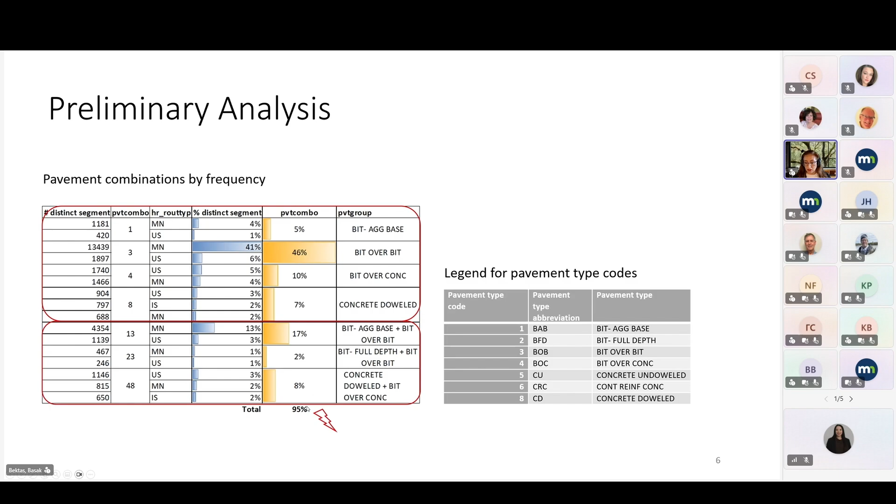As pavements age and undergo rehabilitation, their compositions and types evolve. Most segments in our data set are associated with one or two pavement type codes within the data, and the MnDOT abbreviations for these pavement types are given to you here. The 7 pavement groups shown on screen account for 95% of the data set we got from the Pavement Management Unit. So this formed our initial base data set.

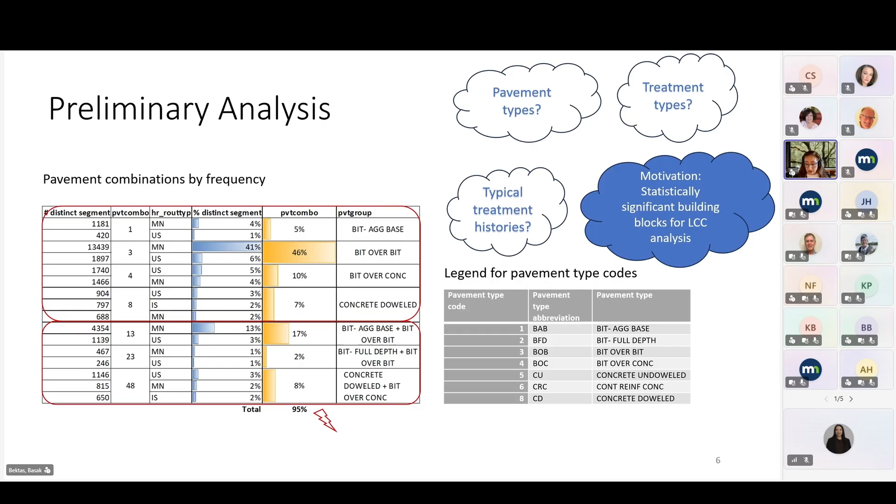We also conducted preliminary analysis to identify the most frequent treatment types and the sequencing of these typical treatment histories. This very comprehensive preliminary analysis was done with the motivation to build data block samples that will eventually help us model the life cycle pavement performance in a statistically significant way, so that we can utilize them in a life cycle cost analysis we have confidence in.

While we initially attempted to classify preventive maintenance directly from the data - there was a question, particularly from MnDOT partners, of how you define preventive maintenance based on data - we attempted to do that, but the variability in the RQI data made a purely data-driven classification unreliable.

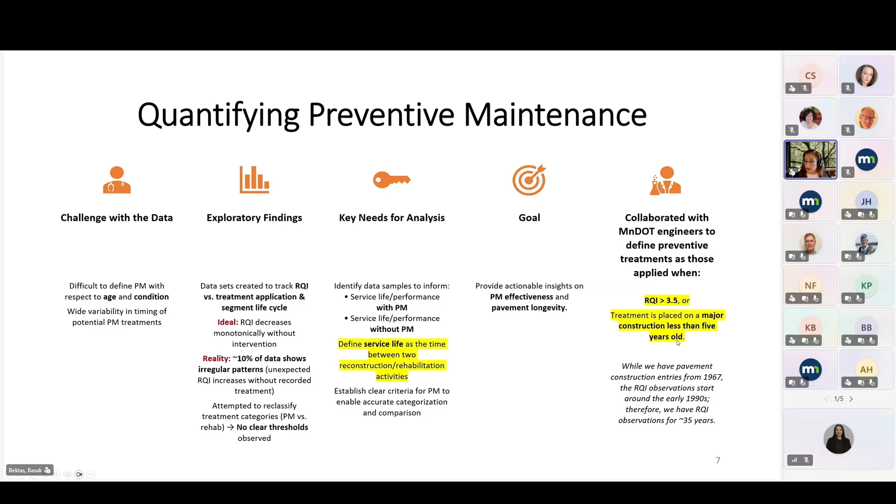Instead, we first defined what I call base service life - not the full one - as the lifetime between two successive reconstruction or rehabilitation activities. Working with MnDOT engineers in some meetings, we identified PM treatments as those applied when RQI is greater than 3.5, or when the treatment was placed on a major construction less than 5 years old. Both of these, of course, lead to pavement still in good or near new condition.

For pavements with the data organized, we fit viable survival models to estimate time to rehabilitation for each pavement type, segmented by their PM history - PM being preventive maintenance, as I'll refer to often. The sample with pavements without PM, or any treatment between two rehab or reconstruction activities, had over 1,200 records, with mostly asphalt but some concrete pavements as well.

When we looked at the sample of pavements with PM, we focused on those with 1 or 2 PM activities, which accounted for the majority of the data set. Pavements with 1 PM were most frequently concrete pavement, with PM treatments like maintenance patching, joint seals, and joint repairs. Pavements with 2 PM were mostly asphalt pavements with typical crack repair, chip seal, crack fill, maintenance patching, and so on.

Here are the findings from our survival models. I want to highlight a few things from this slide because they tell an interesting story. For bituminous aggregate base, the scale parameter alpha, which you can think of as the characteristic service life between rehab or reconstruction, increases from about 15 years to nearly 21 years with 2 PM applications. This is a meaningful jump.

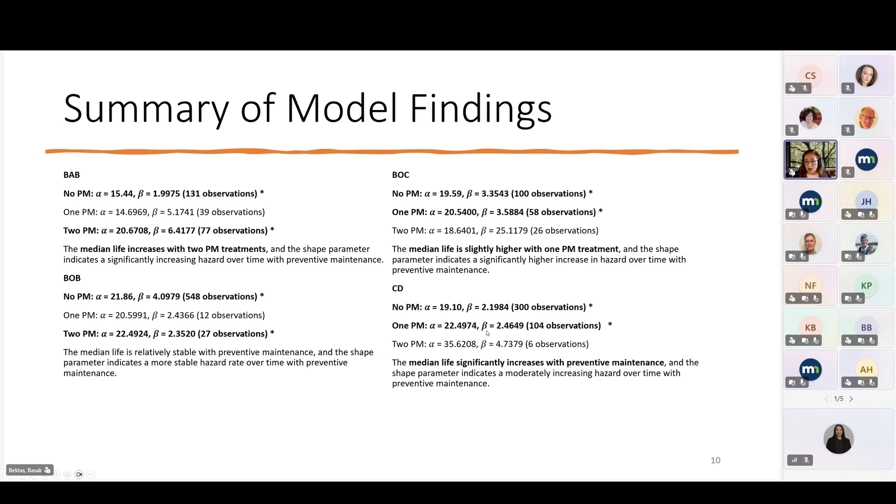This slide visualizes typical Minnesota pavement life cycles to illustrate how the survival models feed into the life cycle cost analysis. The intervals between the arrows represent time to PM, so the purple arrows are PMs, and we have rehab or reconstruction as orange arrows. The intervals between these arrows come from our data and models.

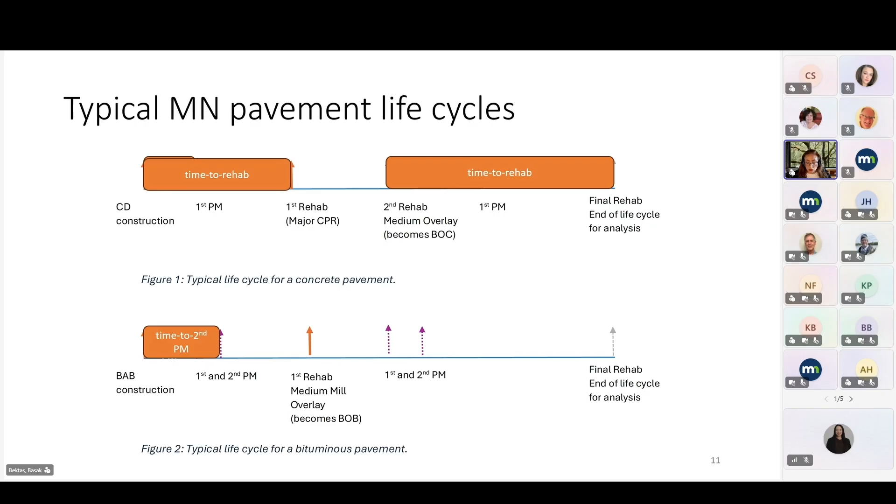So with the time to PM, we are looking at the statistical distribution, and with time to rehab, we are looking at survival models. So each carries a statistical distribution, and within the Monte Carlo simulation we did for life cycle cost analysis, these intervals are being sampled from their respective distributions as we calculate life cycle cost, propagating the uncertainty from the survival models through to the final cost estimates.

To translate service life results into economic terms, we use life cycle cost analysis, specifically equivalent uniform annual cost, or EUAC. EUAC allows comparison across life cycles of different total durations on an annualized basis, which matters here because PM extends service life. We conducted Monte Carlo simulations, thousands of iterations, randomly sampling the time to PM and time to rehab, as I showed you.

And we incorporated PM construction and rehabilitation costs, which gives us a distribution of life cycle costs rather than a single point estimate, better reflecting the real world variability inherent in pavement performance. Eight spreadsheet models were developed for the simulations, comparing life cycles with PM treatments or without, for asphalt and concrete pavements, and in urban and rural settings to also capture that cost variability.

Here are the results from life cycle cost analysis for bituminous pavements. The annual cost savings from applying PM range from $10,000 to $10,600 per mile per year, whether in urban or rural settings, and that comes with an added service life of roughly 5 to 6 years.

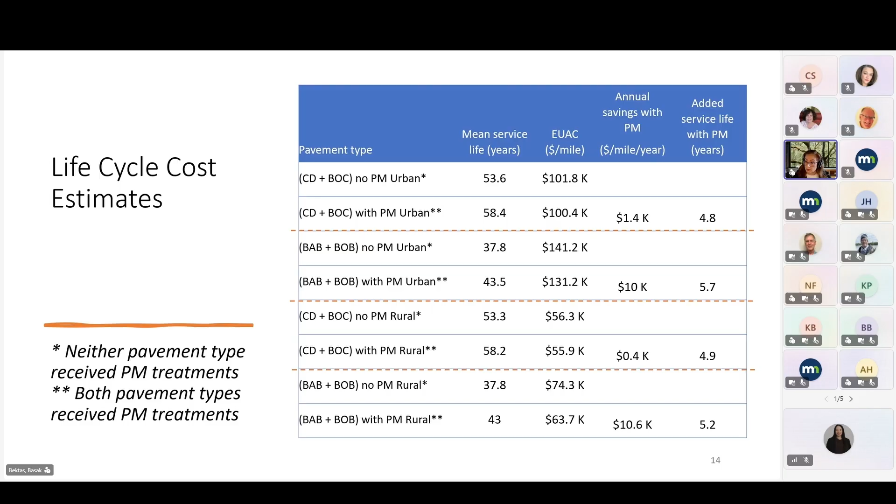A few important caveats I would like to mention. This analysis focused on agency costs only. Including other things such as user costs would steer the results even more favorably toward preventive maintenance. User costs, design factors such as traffic loading, long-term performance, and environmental conditions were not covered. As a result, the findings should not be interpreted as a comparison between concrete and asphalt pavements.

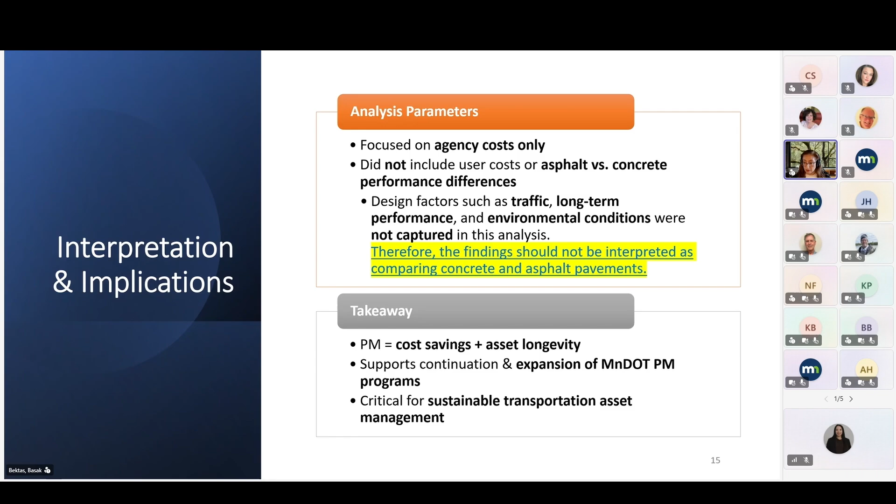But the core takeaway is straightforward: preventive maintenance delivers measurable cost savings and extends asset lives, and this is supportive of the continuation and expansion of MnDOT's PM programs, underscoring their importance for sustainable transportation asset management.

Here I also list key findings, some of which I've mentioned. Obviously, we have service life extension from statistically significant models. We have covered economic benefits, which have great potential across the network.

I will also emphasize how we defined PM at near very good condition pavement, and research findings enabled the development of enhanced decision trees that we shared with the agency.

Some recommendations we provided for MnDOT's future research or internal use: we developed enhanced decision trees that they would filter with institutional knowledge and expertise to adapt to existing guidance. There could be certain pilot programs to address areas where we didn't have as much data, such as concrete pavement preventive maintenance, and future research could explore other models.

Ultimately, our goal is to have helped the agency with data-driven tools that can feed into asset management practice.

So the question at the heart of this research was, can we prove the payoff of preventive maintenance? I think the answer, as I tried to show you today, is yes, at least for Minnesota's pavement network and with the data and methods we had available.

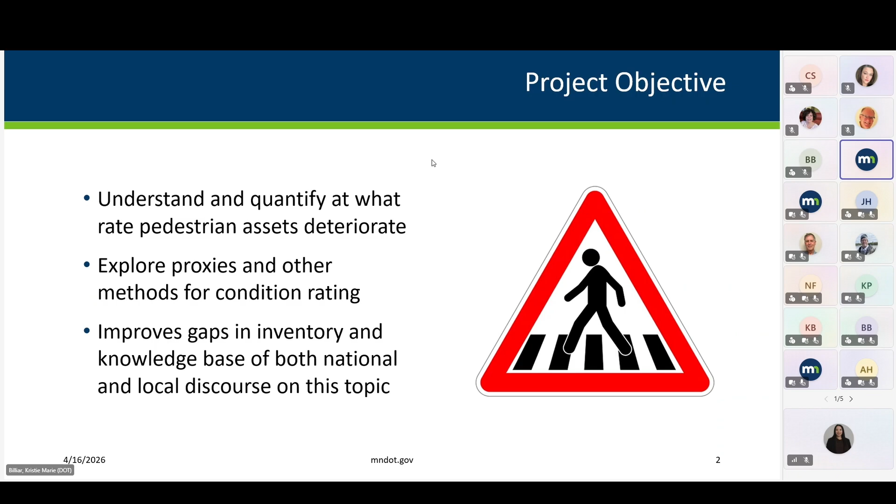We had 5 key steps for this: begin with literature research and a survey of agencies to understand where we're at, and whether this is a really worthwhile need. Then we did our field data collection, the processing of that information to create our baseline, and then developing the methodology of whether we can actually track deterioration, and the evaluation of that methodology.

Our survey touched on responses from 56 entities and 40 unique agencies spanning 25 states and the District of Columbia. Many of them were state DOTs, as you can see, but we were able to get a sensibility of what's going on at lower levels as well.

One of the most striking things, if you do work in bike and ped, probably not terribly surprising, is that pedestrian assets are generally found in the planning area. They really haven't moved into the operations place in most cases. This is part of why state DOTs were answering this survey, as we see TAM and TAMP type programs evolving in agencies, this need is coming up to the surface. But again, not unusual, we do see this quite frequently.

Finding who needed to respond to this was difficult. It sits aside from many of the main agency needs, and there is no particular champion for it. This is a little bit even why in MnDOT, ADA has a bit of a larger voice about pedestrian issues, even though we have a fully formed bike and ped office.

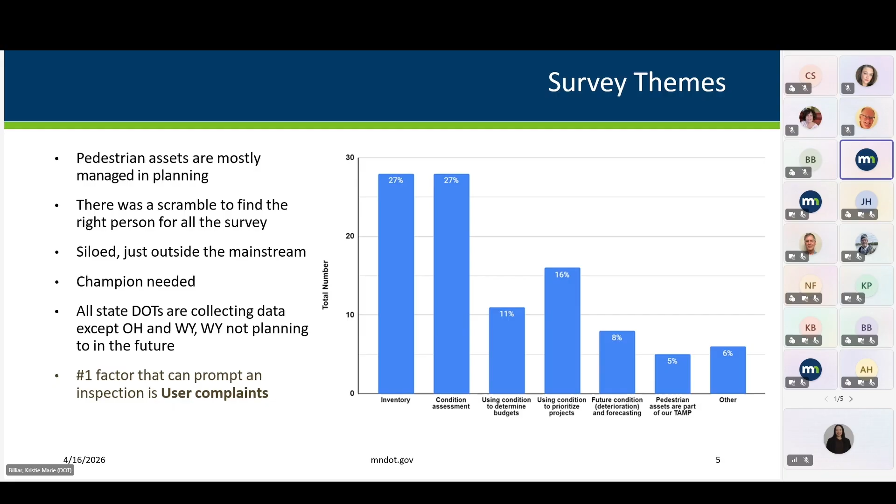All of the states were collecting something, with the exception of Wyoming, which is not planning to do so in the near future. And to give a better sensibility about that gap, user complaints are still our primary understanding of what our system needs. So we don't really have anything routine.

Our first piece in that field data collection was to look at what technologies are available and evaluate alternative assessment methodologies. We did 13 sites that were collected, totaling 15 miles. This is really about the sidewalk portion of the pedestrian access route.

Our decision was to use a bike-based data collection for collecting information on pedestrian assets. This is a data bike that has actually been used by Iowa for trails in the past, and they have a really good system for doing that. It's equipped with an iPhone, GoPro camera, and a 360 camera, which gives us a sense of the wide view, the roughness, the sensibility, and the 360 camera really functions as that LiDAR piece as well, showing what's going on around it.

This is something we've also found in the past. There's been a real push for us to collect this information from LiDAR, but unless you're doing a vehicle that's dedicated to that particular route and corridor, it's very hard to get information about the pedestrian assets from the center line, because you have parking in the way and you get a lot of distortion in that collection process.

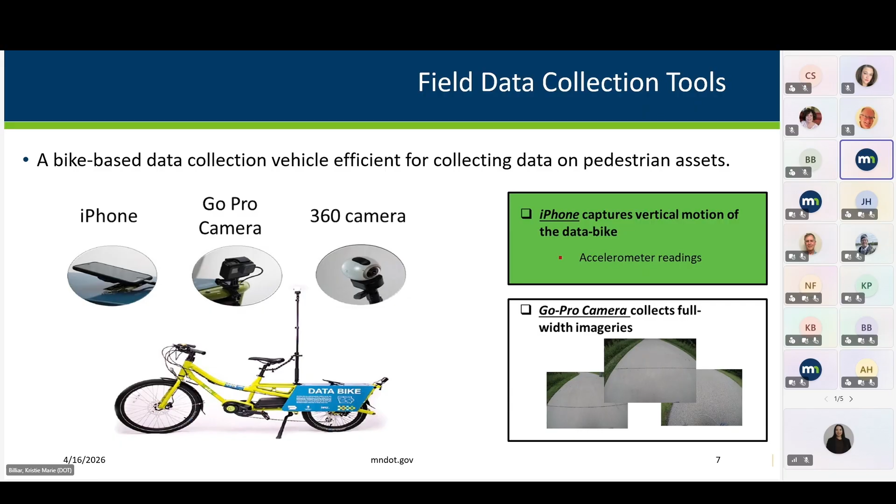So this was our historic baseline that we were trying to identify, finding some other gaps in data, mostly in the form of gaps in the existing system, so places where sidewalk might be missing. Condition assessment was largely a visual assessment, trying to get that inventory of distresses - where are things cracking, where are they heaving, interrupted by vegetation. The delineation of pedestrian asset management sections became our next piece, to calculate distress density and identify sites where condition had changed.

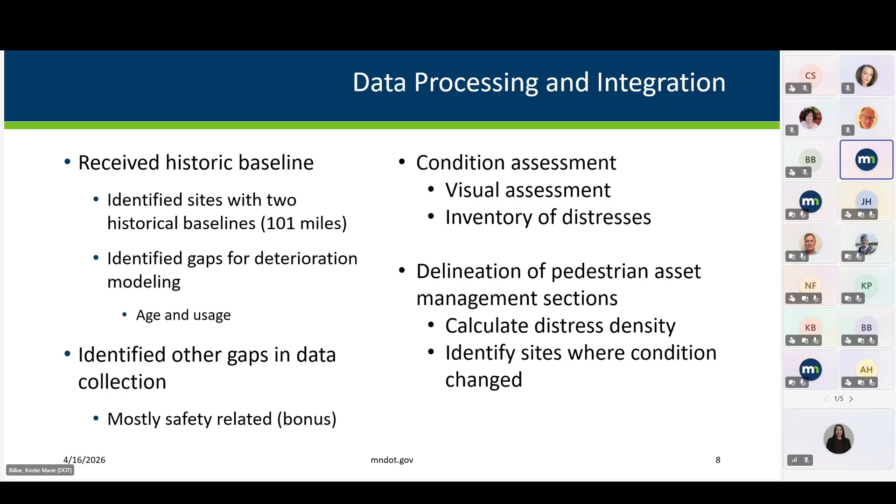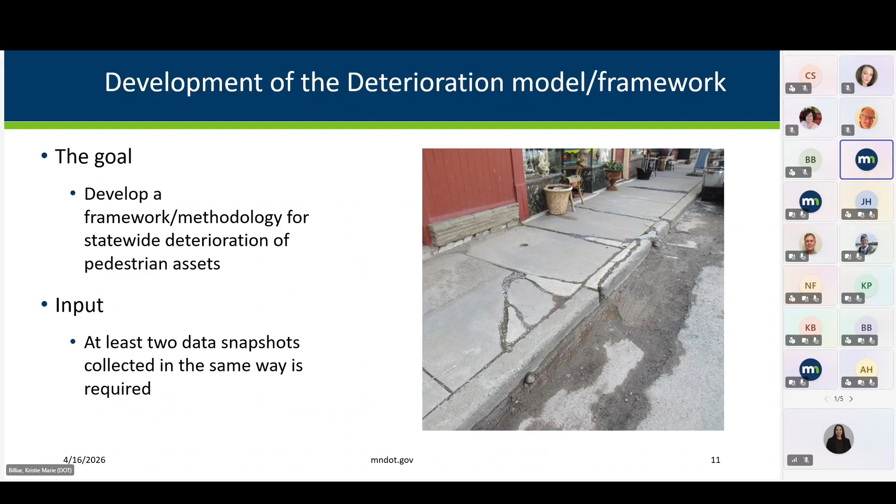At this point, we're now trying to develop a framework methodology statewide for the deterioration of pedestrian assets. We're looking for at least two data snapshots collected in the same way. This was a big requirement and a driving force behind how we were going to select what we would do for our deterioration model after the baseline.

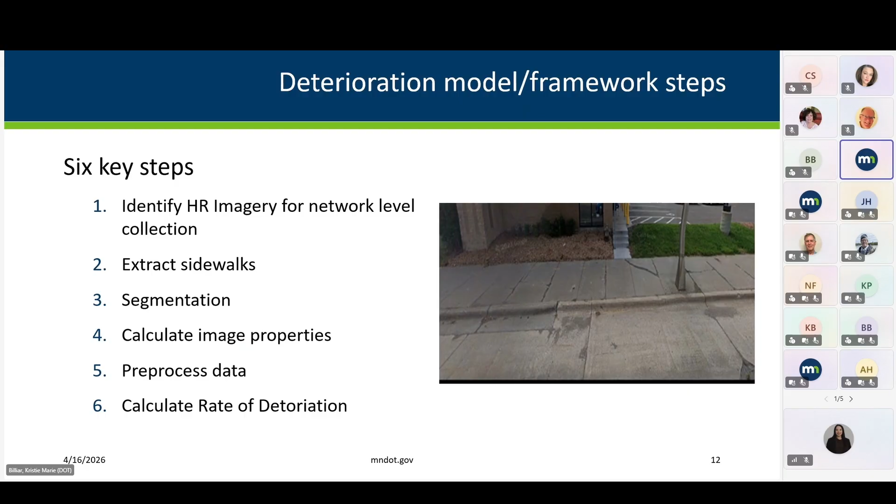So we had to find a way to identify high resolution imagery, extract the sidewalks from that imagery, give it a segmentation so that we were doing things consistently, calculate those images, preprocess the data, and then calculate a rate of deterioration. Spoiler alert - we did figure this out. We actually have a very good proof of concept.

Our data source selection - we looked at all of these: Google Maps, Earth, MnGeo, LiDAR, and NAIP. We ended up going with MnGeo aerial for a variety of reasons. Mostly, it's largely consistent - we collect it in the same way. Being under MnGeo, it's also readily available.

Using a lot of other systems like Google Maps, and that would extend to the Microsoft products as well - those are only available as a point in time. There are little variations that make it very difficult to do the digitizing of that information.

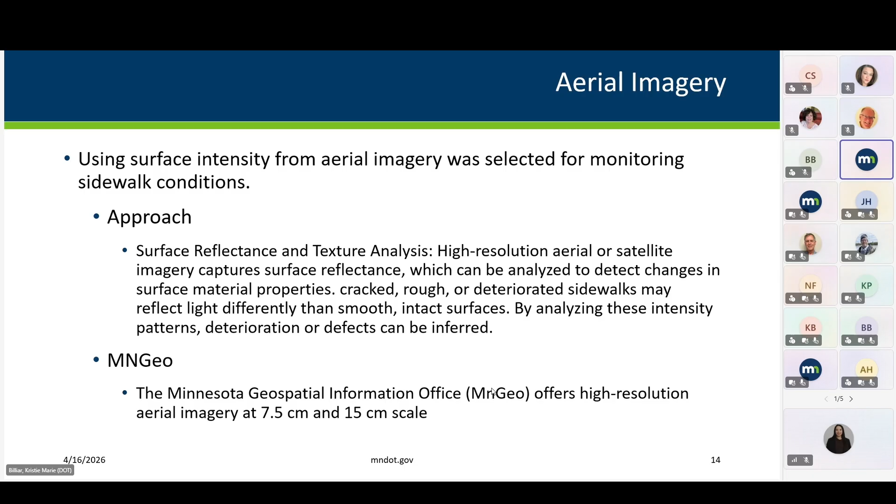So we were looking for surface reflectance and texture analysis - that's going to get what's going on with our sidewalks, what's happening with those cracks. And again, with MnGeo, we were able to get high resolutions at a couple of scales, so again, a very worthwhile approach.

So it facilitates consistent and uniform data collection. It also integrates very well with GIS, which is how that baseline was collected, so you're really getting an excellent comparison. And it also creates a measure of automated and semi-automated analysis.

For anyone who's been involved with the collection of pedestrian assets, at this time it is a very labor-intensive process. And when you're trying to calculate density or deterioration, it's not reasonable to be going out every couple of years to figure out what's going on. So this is part of how do we automate it.

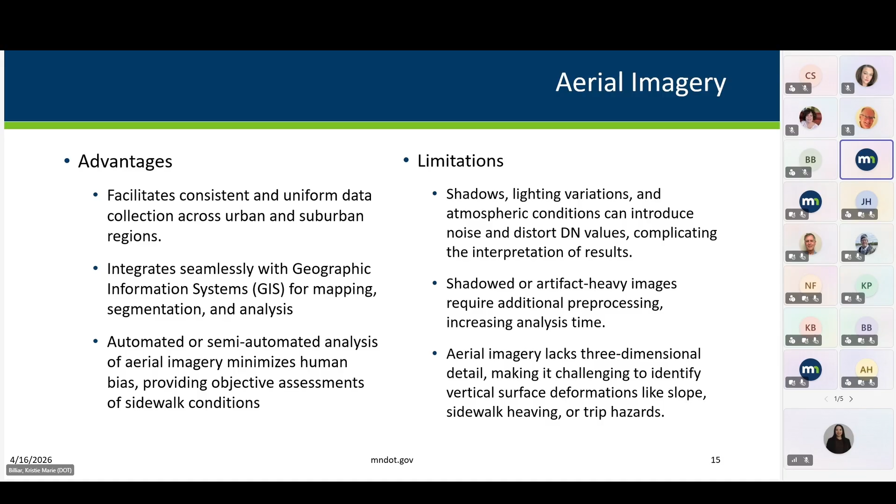There are some limitations with the aerial imagery that had to be overcome - shadows and lighting variations, shadowed artifact-heavy images, and aerial imagery lacks that three-dimensionality. So that was one of the pieces that we did sacrifice.

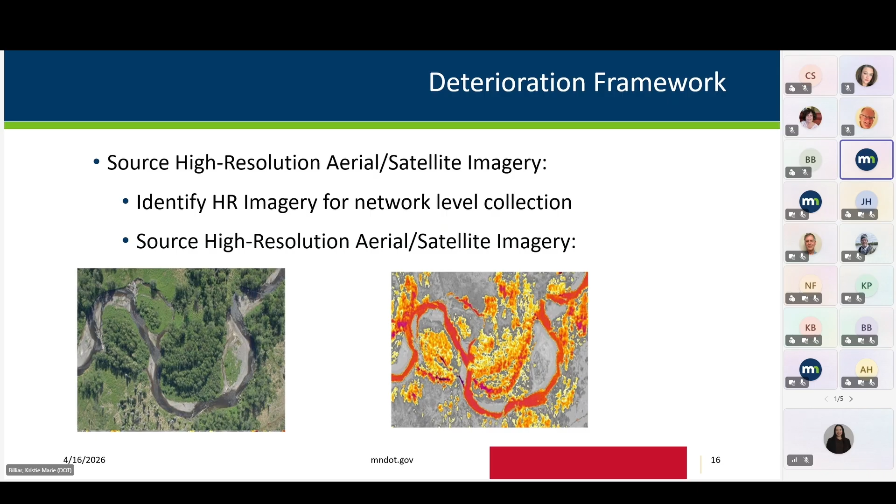So this is our high-resolution satellite imagery, and it allows us to do a network level of collection. It's a high-resolution satellite imagery, so you can see below.

So the next was really just doing a sidewalk extraction from those images. This was a much cleaner way to do this. Again, you aren't dealing with vegetation and all of that variance, and you get very clean polygons to do that.

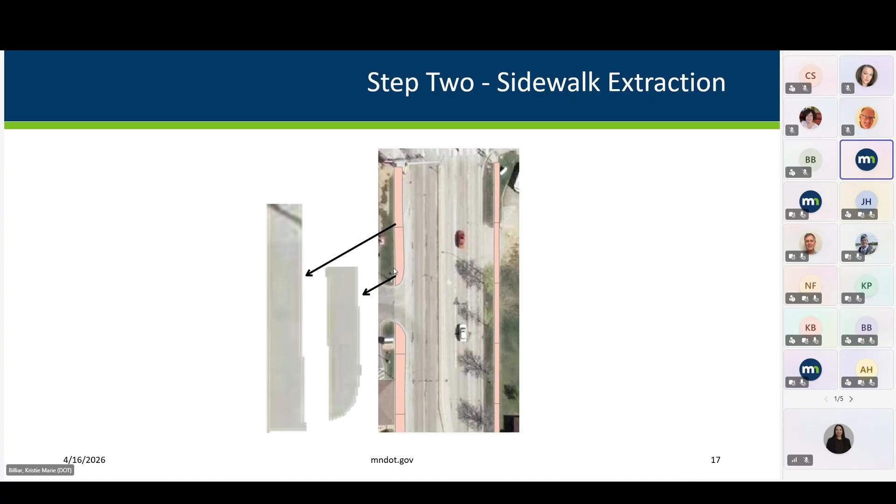The next piece was to take those polygons and segment them down further to 0.01 mile segments so that we could really get a detailed variation in the surface conditions, because the longer a section you do, the less accurate you are. So it was adaptive segmentation, adjusting dynamically with environmental complexity.

This is a little bit of why we also needed to know what was going on around it. For the attribute assignment, we identified this is a sidewalk, its age, foot traffic, proximity to trees, vegetation, and other environmental factors. So we're trying to get a little bit of context to that asset as well.

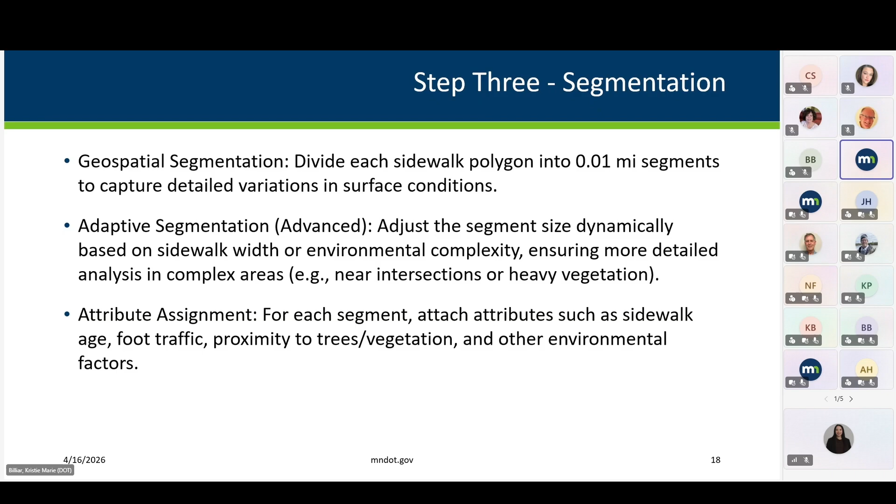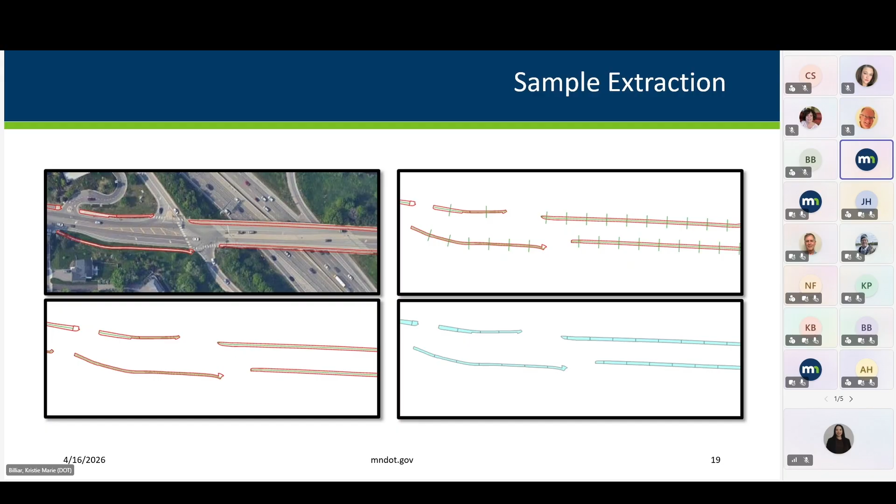So our sample extraction just walks through. This first is basically identifying the polygons and then getting down to that. This is where we are on the right, and then the image with the little hash marks are the 0.01 mile segments. So this is then the final how it would show up on your mapping.

So for the image properties, we needed to calculate surface intensity. We looked at surface reflectance data, which basically shows the cracks. Our statistical metrics were standard deviation for measuring surface roughness and variability, the mean, the median, and this resulted in what?

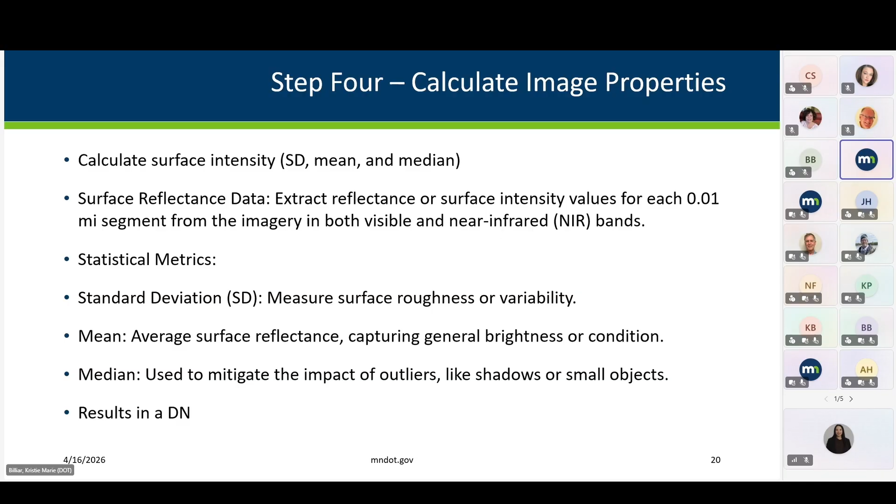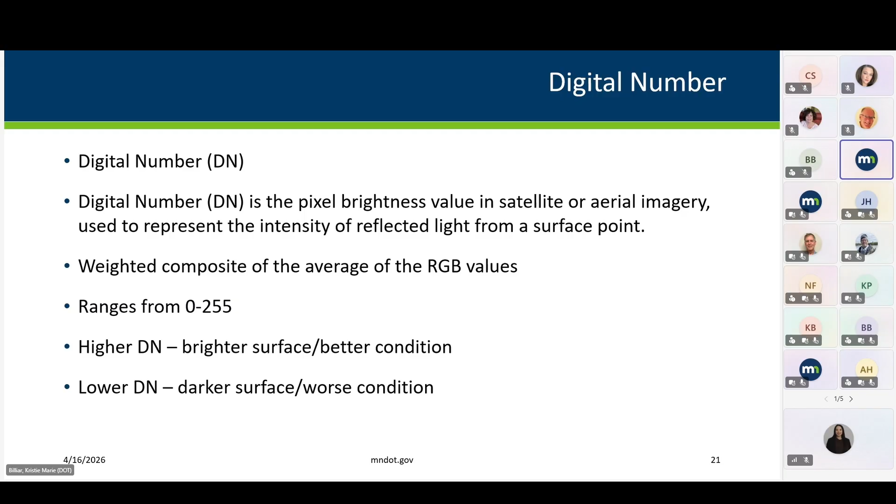A DN, or a digital number. That digital number is the pixel brightness value in satellite or aerial imagery, and it represents the intensity of light reflected from a surface point. That becomes a weighted average with ranges from 0 to 255. The higher DNs represent a better condition asset, and lower DNs represent a worse condition asset.

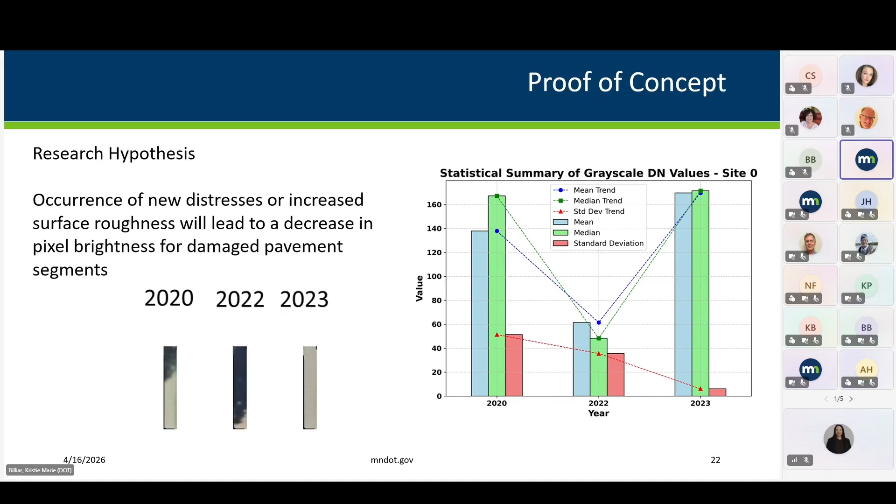That was one of our considerations when we were doing that initial field gathering of data, making certain that we were able to look across time to something that had been reconstructed.

So we basically had to run through and pre-process and clean all of that data. As I said, there are artifacts in that, so we had to really work with the base aerial images. We needed to make certain that we could do that.

That's where the comparison across the multiple years comes in. The mean median difference and the threshold is the difference between the mean and median to identify the year where shadows or vegetation may be skewing the intensity values.

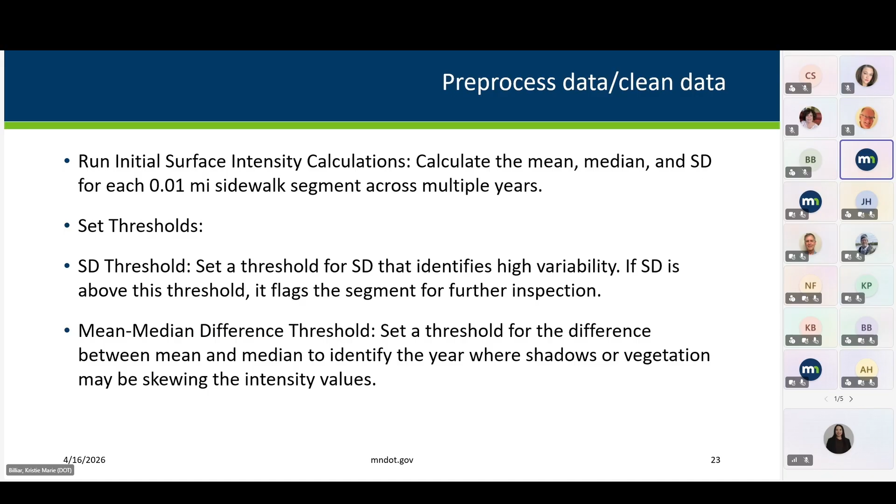So we are able to track that over time, across multiple years, then we calculated the slope, which is our trend line of the rate of deterioration, and then we correlated the intensity to actual field collection data to create a reference baseline.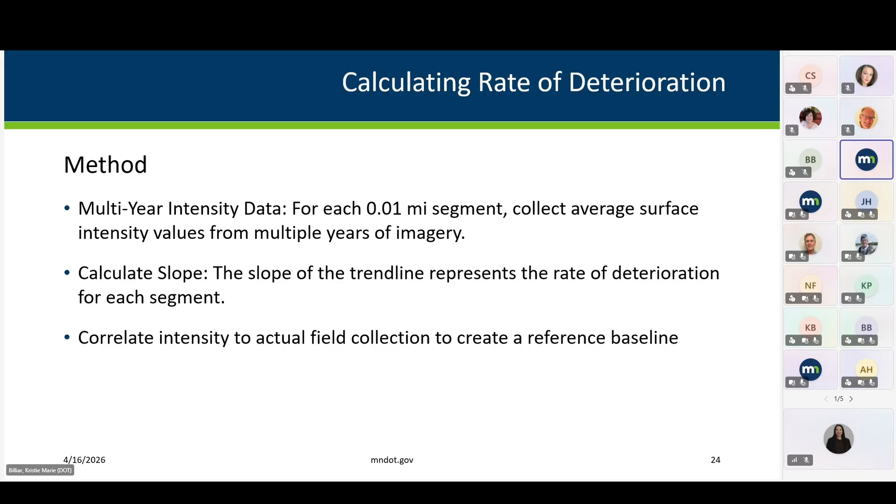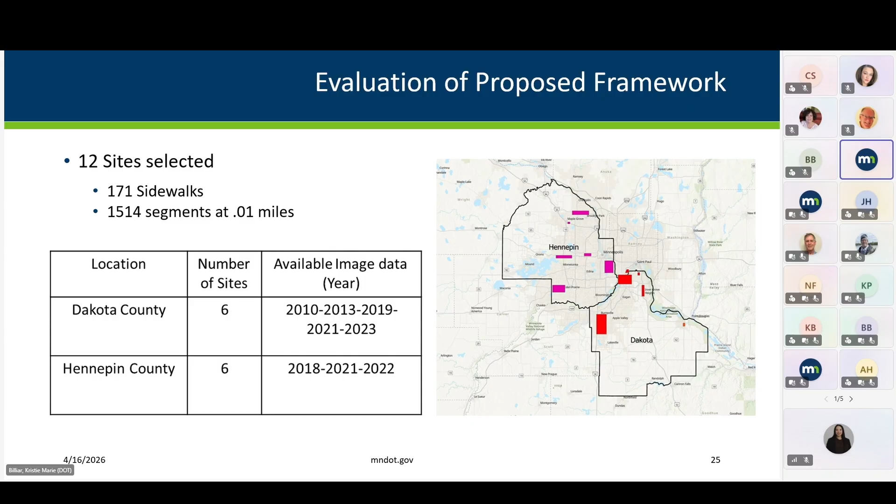So we did that. We applied this model then to 12 sites, 171 sidewalks, representing 1,514 segments. We were entirely located in Hennepin County and Dakota County.

Generally we're looking very high, but we do have consistent deterioration across the years. So it's something that doesn't necessarily have a sudden event, but we do need to be mindful of what that deterioration rate is, and should we be doing any intervention, and what does that get us, if anything? Generally we saw a pretty consistent deterioration of 2.63 negative.

So that was reasonably helpful. Systematic filtering eliminated 90% of the anomalies, so this is a pretty clean method. We were able to see that we could be predictive about this, so we now have a good understanding of what we will typically see in our system.

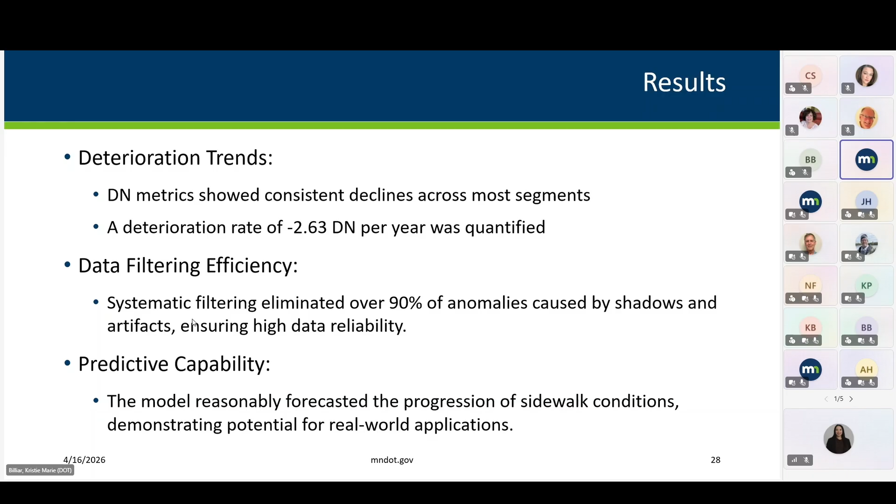The goal is really to hopefully reduce construction costs by seeing if we can do early detection and do some interventions, like panel replacement, any sort of things of that nature. Improving the life cycle cost of the total asset by making certain that we are doing incremental fixes versus having to wait until something needs reconstruction. That also helps us manage our liability under ADA.

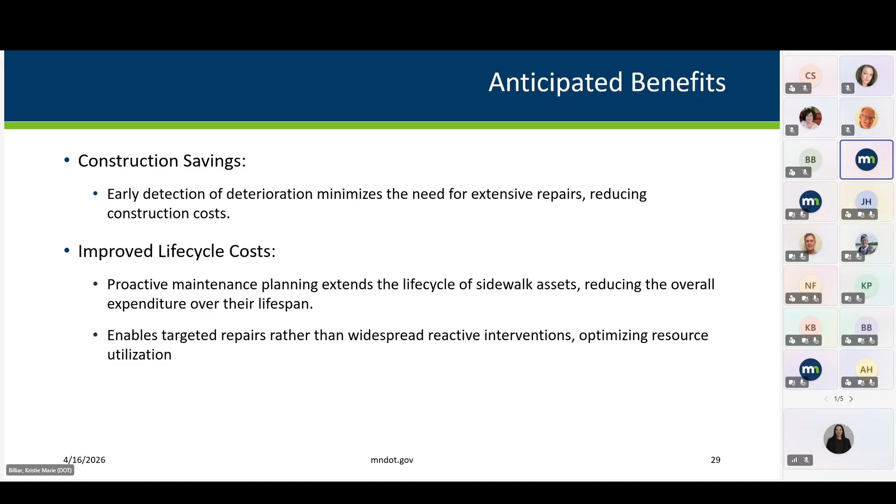And hopefully to reduce risks, not only with the trip and fall standpoint, but also with our ADA liabilities. It is a relatively reliable mechanism for risk assessment and prioritization. So this does feed nicely into the TAMS models.

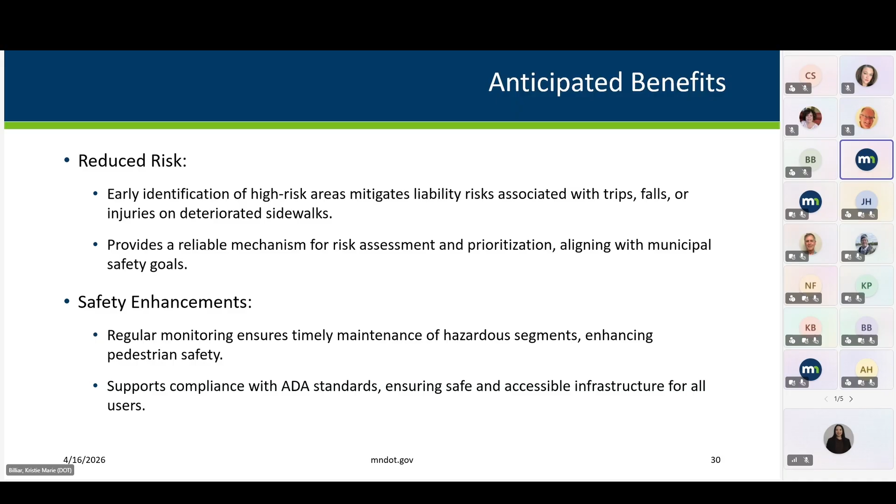Safety enhancements, being able to recognize right from the jump that this is going to be an issue, and we don't have a project until X number of years away. So it can be far more dynamic, because historically our management of PED assets has been: we're doing a reconstruction project, now is the time we'll address our sidewalks.

And that's been true from state down to cities and counties. And then the other is anticipated benefits, a little bit on the lower side, but the environmental benefit can be that we aren't having to mobilize as frequently, and we are using our materials more effectively.

So from there, we are probably ready to go into starting to deploy this a little bit more. We do need to develop some training. We are also waiting for the completion of another project called SARC, which also piggybacked off of this work. So those two have been in interaction. They have developed some training as well, and we're really trying to test and see what is our best model and approach, and how do we make it available beyond the state. So that's where we are now. And I think I've kept my time, so I will send it off.

Thank you, Kristie. All right, and that was assessing the deterioration of pedestrian assets.

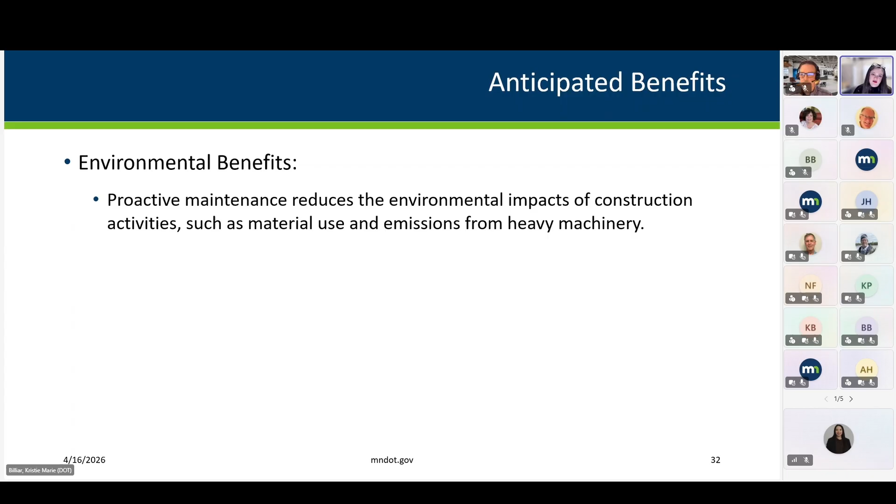Next up. Did I jump the gun? Oh, you didn't. I just realized I didn't stop sharing. Oh, okay. Next up is Chris Sagsveen presenting asset management tools for local governments.

All right, thank you. Thanks everybody for being here and for this opportunity to discuss this topic today. My name is Chris Sagsveen, and the title of my presentation is Asset Management Tools for Local Governments. I'm going to be sharing some QR codes today, so if you're hoping to access any of the reports, I just want to give you a heads up.

Let's see here, sorry about that. I guess I'm actually missing a slide, but this topic is basically the project deliverables, which I'll get into, and then I also have a guide for local agencies in Minnesota, a secondary one that I'm going to touch on after.

But before we get into it, I want to talk a little bit about the LRRB. I'm sure most are familiar, but the LRRB was established in 1959 by the Minnesota legislature, and they provide 0.5% of the previous year's state aid distribution to cities and counties. The purpose of that is for academic research related to not only strict research, but implementation research. This program is unique to Minnesota, and it provides a chance for city and county engineers to offer up new ideas for new research and implementation projects.

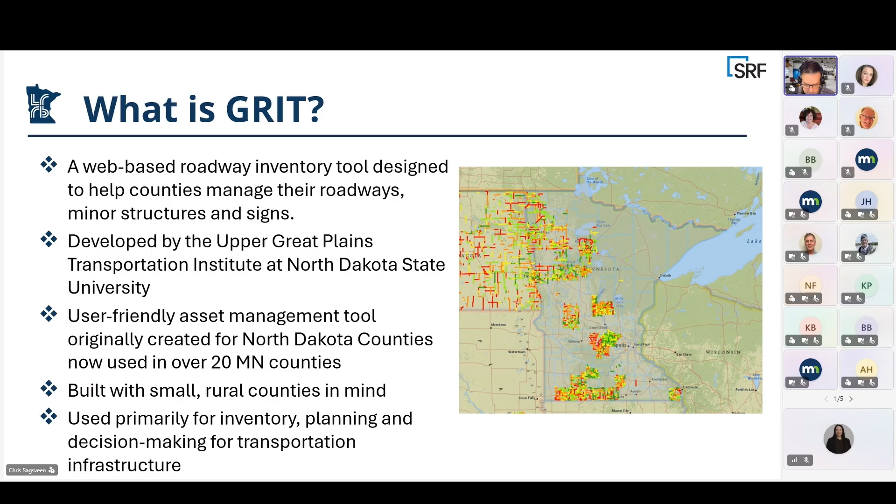So the purpose is to really help county or city agencies collect, manage, and analyze roadway asset data, primarily for inventory, planning, and decision-making of transportation infrastructure, because it's focused mainly on pavements, minor structures, and signs. It does include a module for construction planning, but it wasn't really set up to manage other elements such as storm sewer or underground utilities. So larger agencies in urban or suburban areas would most likely benefit from a more sophisticated product.

GRIT can help counties identify and track roads in poor condition, forecast pavement performance, review past maintenance and construction activities, and plan and prioritize future projects.

A little bit about the technical advisory panel. This panel really helped shape the desired project outcomes. Lyndon Robjent was the chair at Carver County. There were multiple agencies involved, and the team provided a good cross-section of input from city and county perspective. So if anybody's listening today who sat on this, thank you for your help in making this project become a reality.

When it comes to the project goals and deliverables, I've touched on this a little bit, but there's a life cycle tool, which is a downloadable spreadsheet where cities and counties can calculate the cost of maintaining an average road. I'm going to share a little bit more about that in a minute.

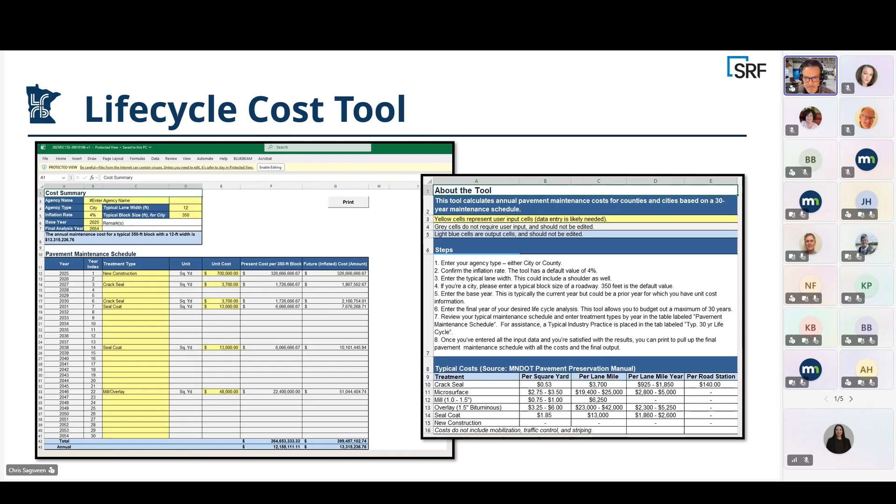There's another resource out there on the LRRB site, a guide for local agencies that's been available since 2019. It's an interactive guide with a summary document meant to help anyone new to asset management get started. There's also a checklist, and it walks you through the background of asset management, software and data, life cycle cost analysis, risk management, and other high-level things to help understand what asset management truly is and how to use it.